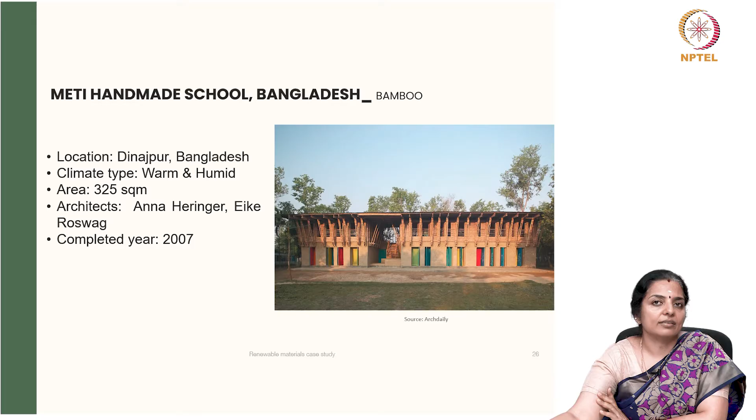Bangladesh is one of the most densely populated countries in the world. It has a lush alluvial plain in the Bay of Bengal. Almost 80% of the population live in rural areas, with an average of almost 1000 persons living in every square kilometer.

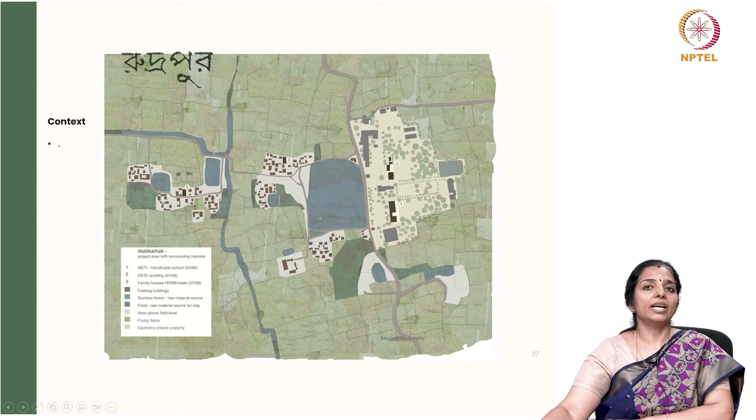Earth, soil and bamboo are the commonly used vernacular materials in these areas. Although construction methods are prone to many errors and many buildings are constructed without foundations or damp-proof courses. These structures are typically only 10 years old and require frequent maintenance, and are frequently vulnerable to damage because of wrong information or being ill informed about the appropriate construction method.

With a free and open learning environment, Meti School seeks to support each student's unique skills and interests while accounting for their varying learning pace. It provides a different approach to teaching than the conventional frontal method. This idea is reflected in the architecture of the new school, which offers a variety of places and purposes to complement this method of construction and teaching instruction.

Now, this is the plan of the Meti school. On the ground floor, it has thick earth walls. You can see the earth walls are extremely thick on the ground floor, and three classrooms are located, each with their own access opening.

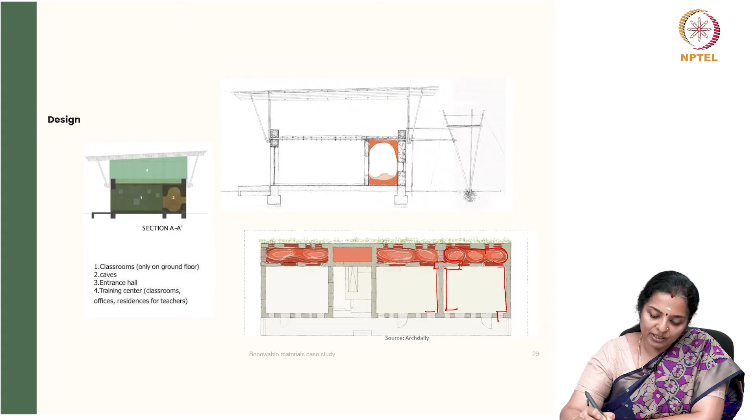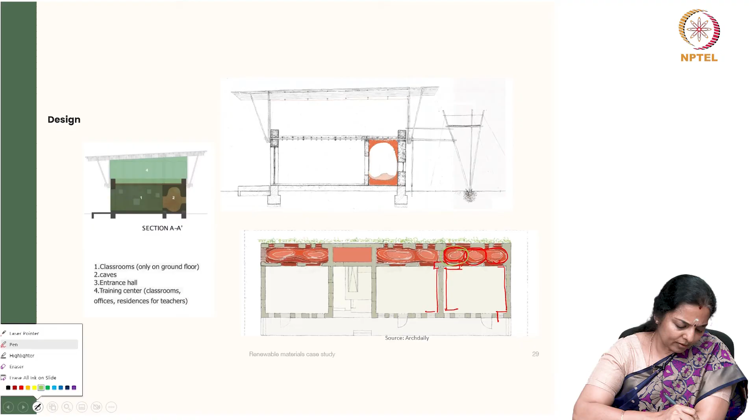And it opens into an organically shaped system of caves in the rear. So, you can see in the rear it opens into a small system of caves.

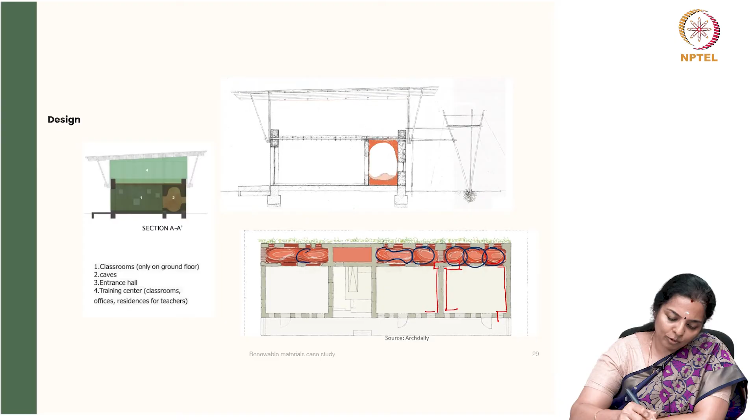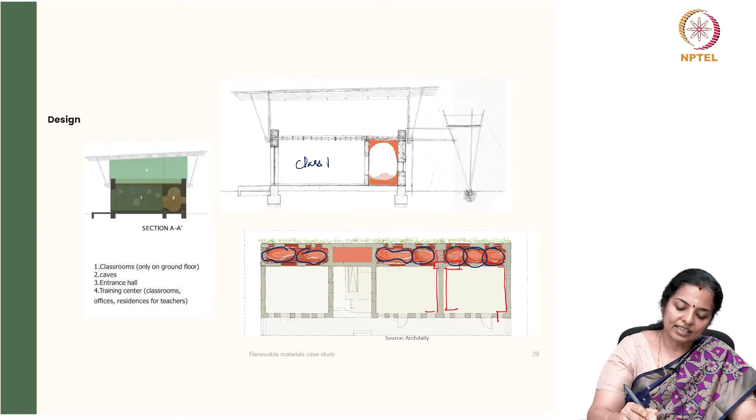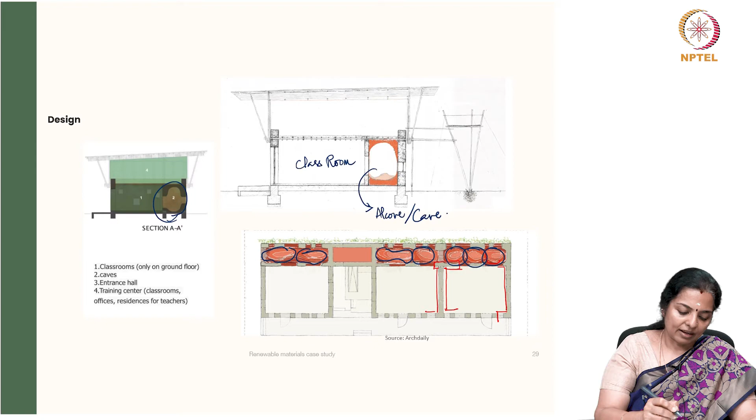In the section you can see that this is the classroom, and this is a small alcove called as the cave, as can be seen here. It is a cave which is only, and there you have classrooms only in the ground floor, separate classrooms only in ground floor.

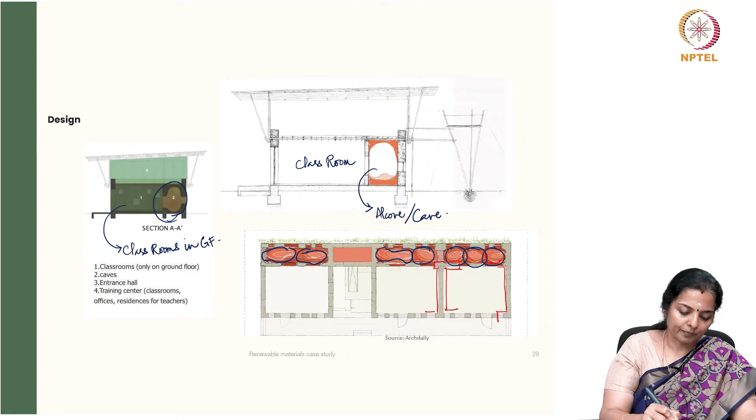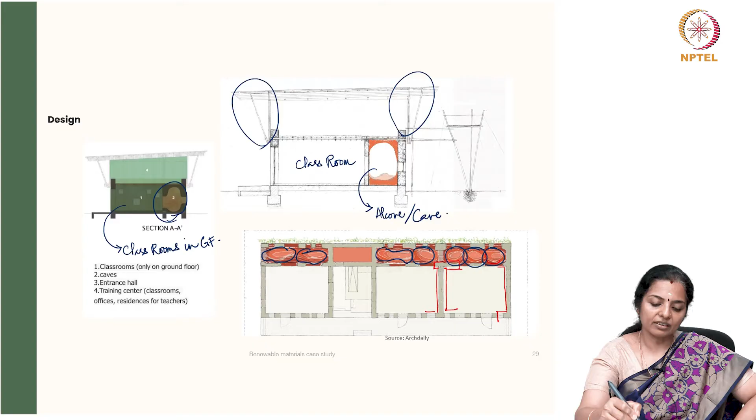The upper floor is by contrast very light and open. If you see, bamboos here, very transparent, and transparent in the sense very light. So, it is very light and open. The openings in it, the bamboo walls offer sweeping views across the surroundings. It has large interiors providing space for movement, providing movement to people, and because of this views as well as breeze, it is very porous.

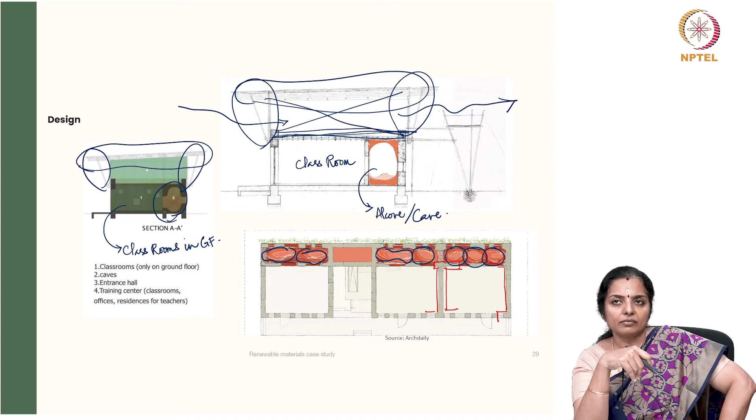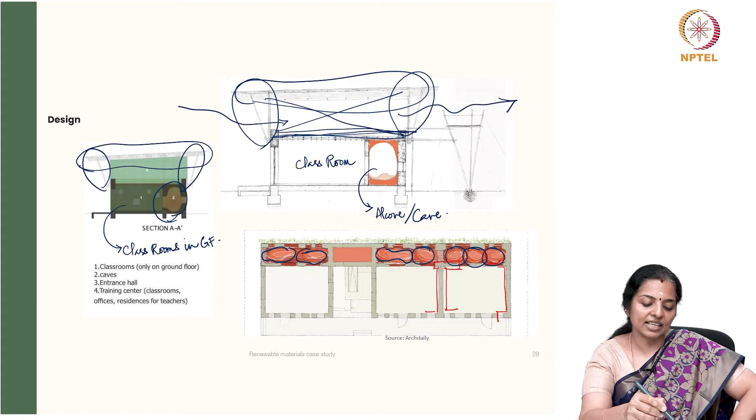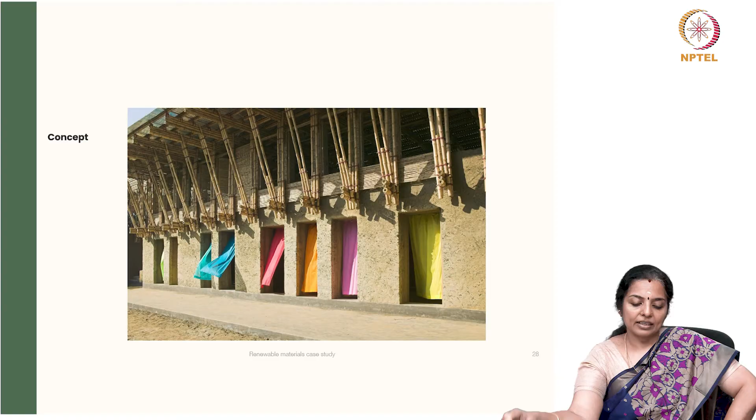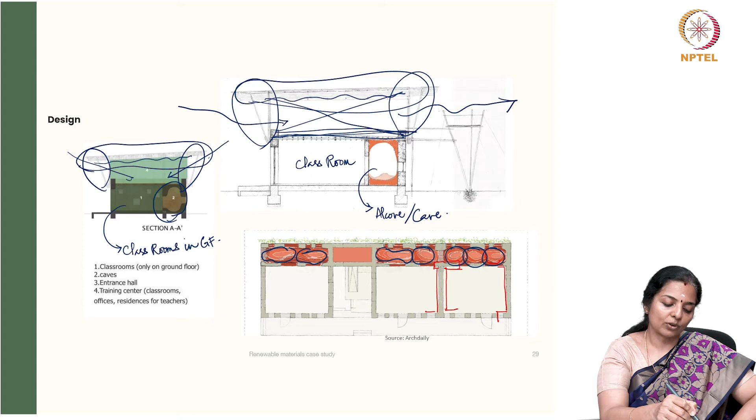Shadows from bamboo strips play across the earth floor and contrast with the colorful materials on the saris in the ceiling. The ceiling has a number of saris draped. I could show you in some other picture that the ceiling has saris, and the light from this and through this casts a beautiful shadow on the floor.

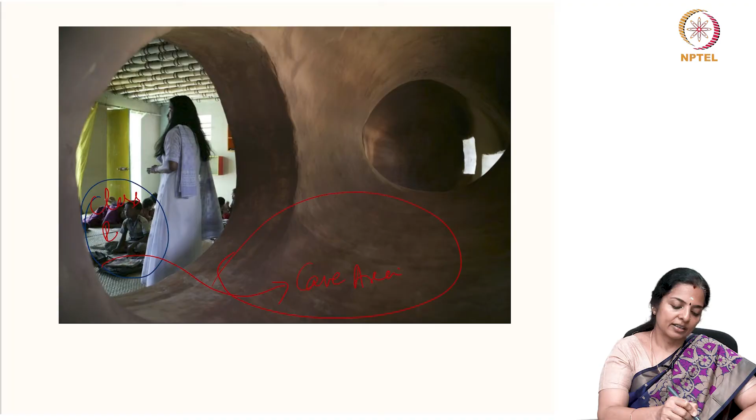This is the classroom area, and this is the cave area. So, students can seamlessly move from classrooms to the cave area. That is by far its design.

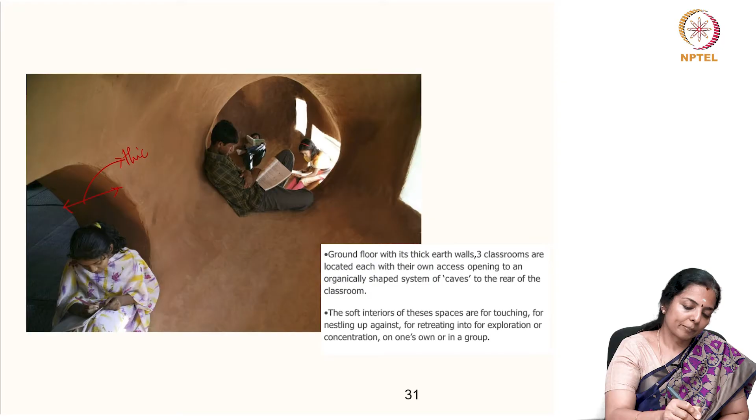So, you can see the thick walls. The walls are extremely thick mud walls, and there are classrooms, and then this is the access to the cave from the classrooms.

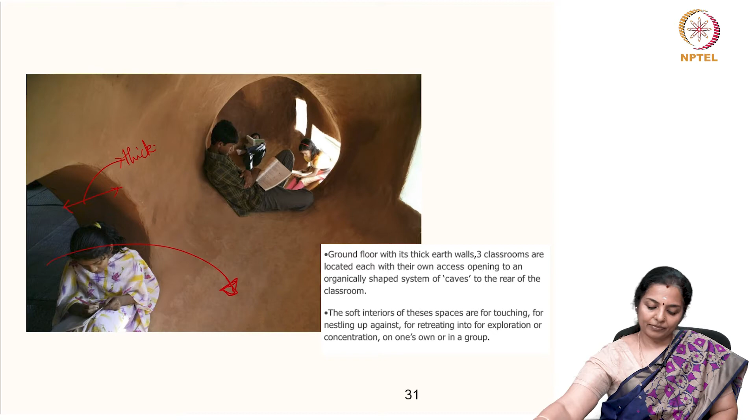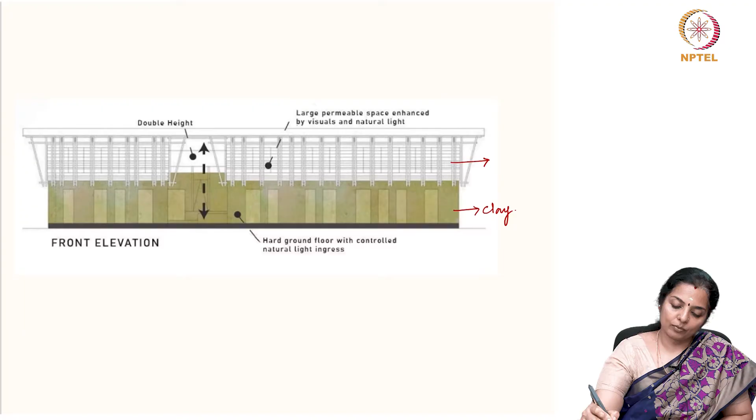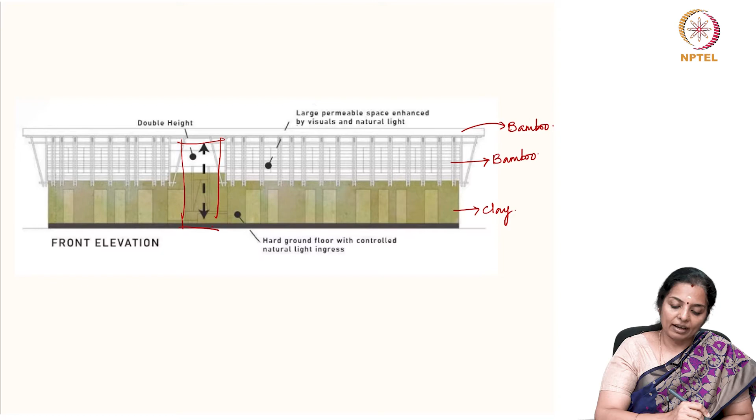So, you can see on the ground floor, this is made up of clay, it's with its alcove, and this is alcove or caves or whatever they call, and these are made up of bamboo. This is also made up of bamboo, and only in one place you have double height, and you have these spaces are large and permeable, allowing breeze to move in and also light to penetrate inside.

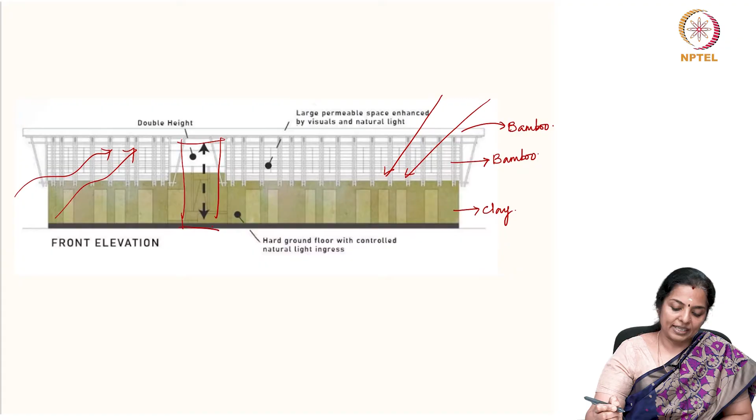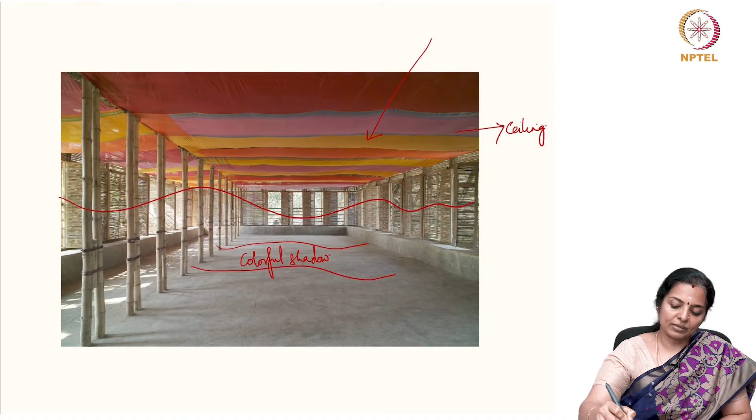These are the saris on the ceiling through which light enters and casts a colorful shadow on the ground, and you have seamless wind movement across the classrooms.

You can see the infill is made up of bamboo mat, and everywhere there is use of bamboo on the first floor.

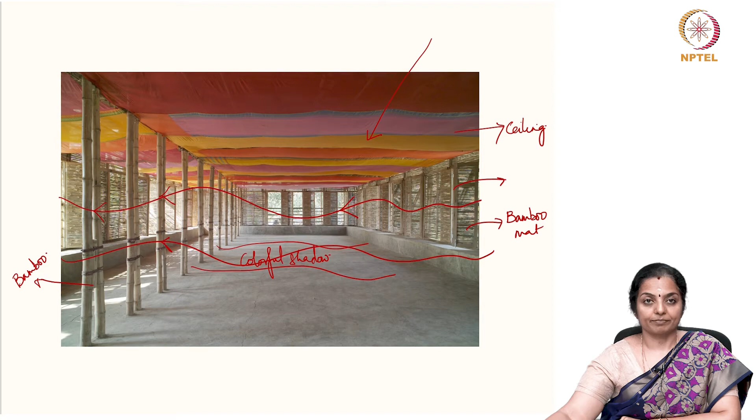Now, the upper story is a frame construction of 4-layer bamboo beams and vertical and diagonal members arranged at right angles to the building. The end of the frames at the short ends of the building and the stair also serves to stiffen the building.

These are connected through additional structural members with the upper and lower sides of the main beams and equipped with additional wind bracing on the upper surface of the frame. Beneath, it provides support for the corrugated iron roof construction and is covered with timber paneling and adjusted in height to provide sufficient runoff.

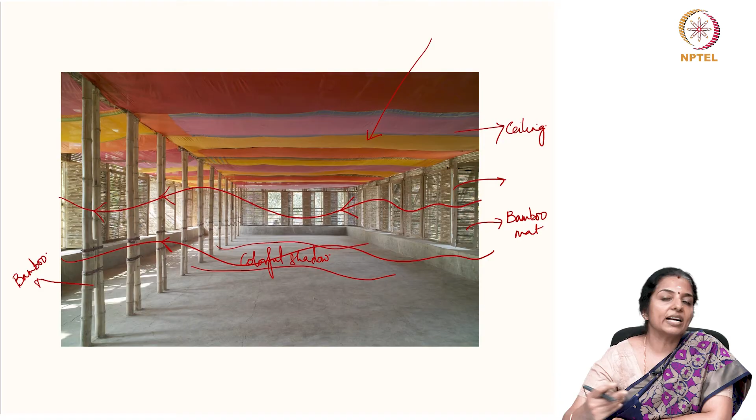The ceiling of the ground floor is a triple layer of bamboo canes, as can be seen here. So, you have bamboo canes, you have the eave area, and this is the classroom area, whereas this is the eave area.

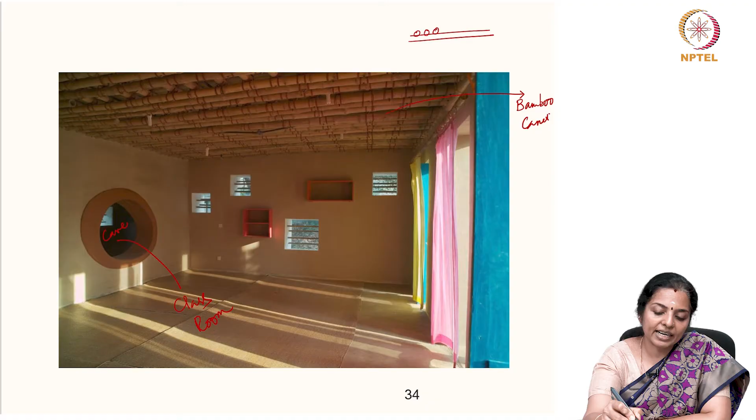The ceiling here has 3 layers of bamboo canes with the central layer arranged perpendicular to the layers above and beneath. So the second layer is arranged perpendicular in section. This is how it will look: first layer, second layer which is perpendicular, and third layer which is on top of it.

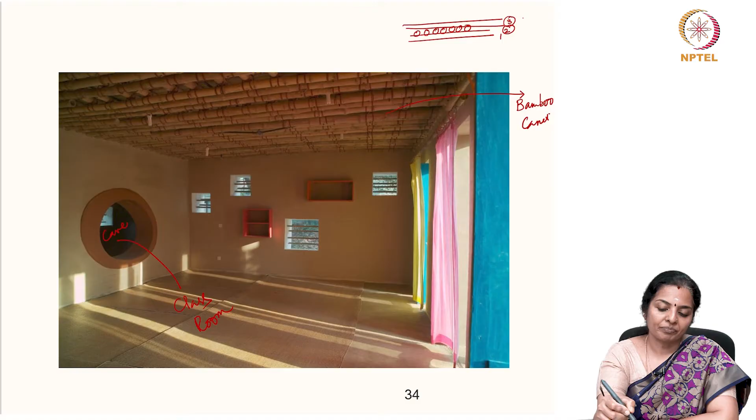Beneath, it provides lateral stabilization and a connection between the supporting beams. A layer of planking made of split bamboo canes is laid in the central layer and filled with earthen mixture, analogous to the technique often used in ceilings of European timber frame construction. And then there is an infill of mud here.

The structure is supported by a brick masonry foundation that has 50 centimeter depth and has a face cement plaster finish. The most popular item produced by Bangladesh's building materials sector is bricks.

The other most important and significant addition to native earthen building abilities is the damp proof course. 2 layers of PE film that is readily available locally make up the damp proof course.

The ground floor is realized as load bearing walls by means of a cob walling like technology. With the help of cows and water buffalo, a long straw earth combination is created, which is then piled to a height of 65 centimeters per layer on top of the foundation walls.

Creating a mud construction, after a few days, any excess material that reaches beyond the breadth of the wall is cut with sharp edges or spades. After a drying period of about a week, the next layer of cob is applied.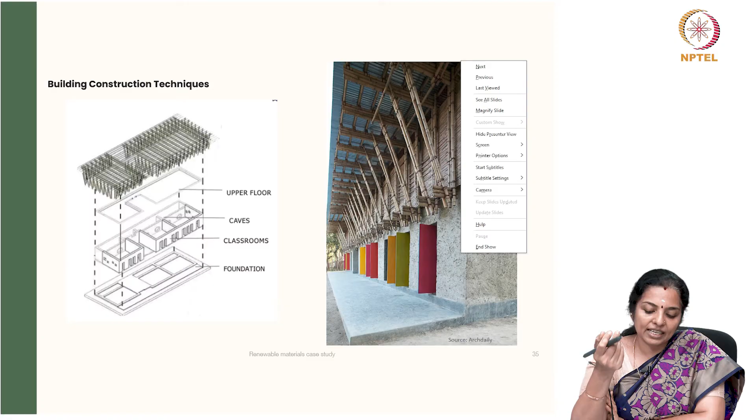In the third and fourth layers, the door and window lintels and jambs are integrated, as well as the ring beam made up of thick bamboo canes as a wall plate to the ceiling. So, these are all cob walls made up of mud. There is a damp proof course.

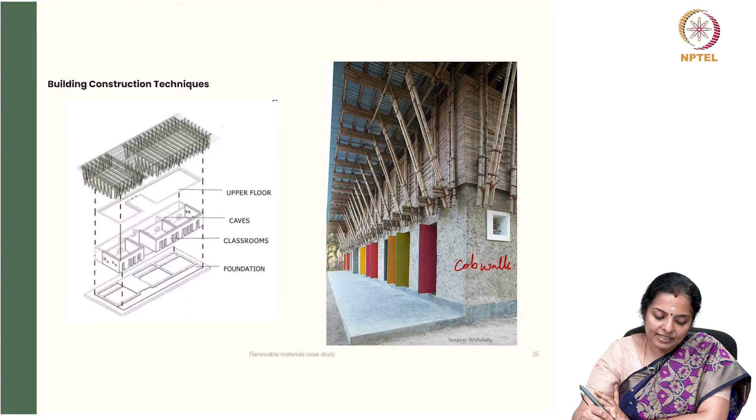So, here you can see the foundation, and then you have classrooms here. These are the caves, and then you have the upper floor, and this is the double story height, and then you have the roof layer.

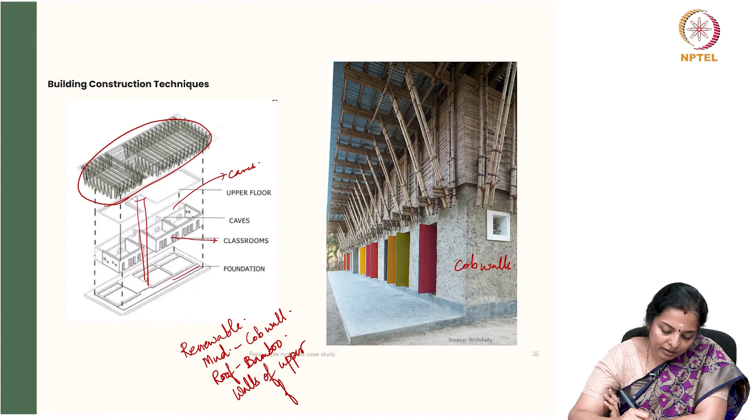All the materials that are used are renewable, because so far mud is used on the ground floor in the form of cob walls. The roof is made up of bamboo, and the walls of the upper floor are made up of bamboo.

The exterior surface of the earth walls is visible, and the window jambs are rendered with a lime plaster. The framework construction of the facade to the rear is made up of bamboo canes placed in footings and made of old well pipe and with split horizontal timbers as lattice work.

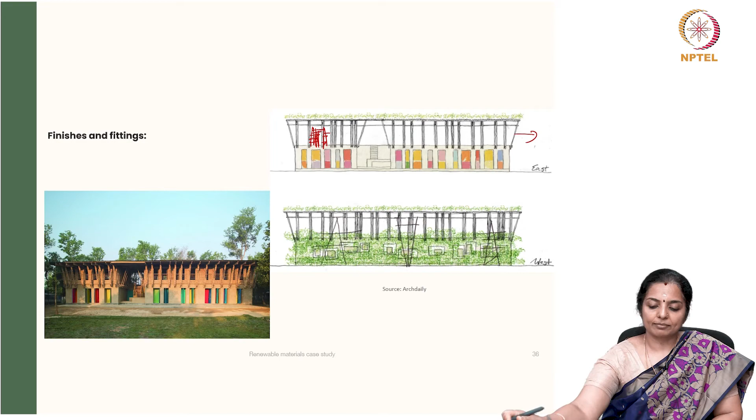So, there is intense lattice work here, and all these are split bamboos posted there. This is made up of clay.

Now, the interior surfaces are plastered with clay plaster and painted with lime based paints. The so-called caves are made of straw earth daub applied to a supporting structure of bamboo canes and plastered with red earth plaster.

The upper story facades are clad with window frames covered with bamboo strips and coupling elements hung onto the columns of the frame construction. A fifth layer of cob walling provides a parapet around the upper story, forming a bench running around the perimeter of the building and anchoring the upper story frame construction and roof against wind from beneath.

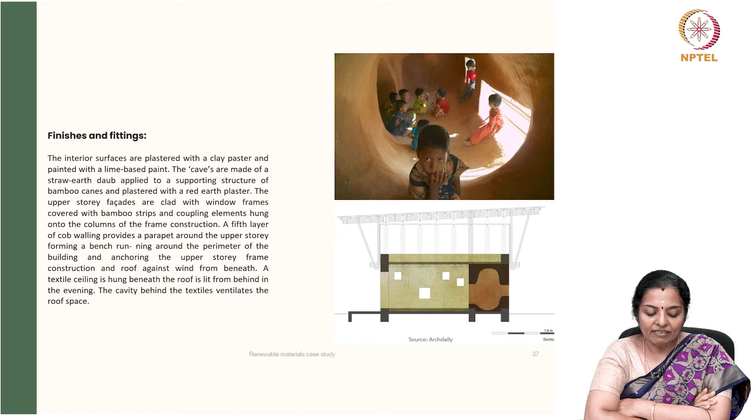A textile ceiling is hung beneath the roof and is lit from behind in the evening. The cavity behind the textile ventilates the roof space.

A beautiful and perfect example of use of renewable materials, and since it is a school building, the on-site labor and training of workforce takes place only with the rural people. The masonry foundation was constructed by a company from the regional capital Dinajpur. The earth building works and bamboo construction was undertaken completely by the local laborers.

The building techniques were implemented and developed on the job together with architects from Germany and Austria. 25 local tradesmen from the vicinity were trained during the building works, creating new jobs and providing professional help for self-help. So a complete picture of how low embodied and low carbon buildings can be built with renewable building materials, using technology from tradition as well as the contemporary period, and getting laborers or help primarily from the local area, making it a self-help labor intensive project.

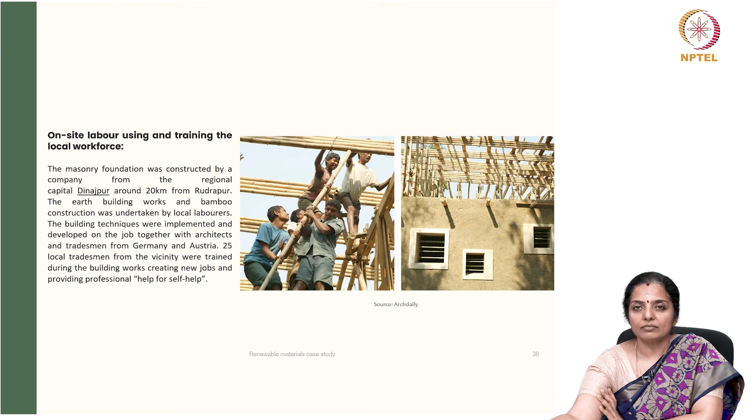So the Meti school is an exemplary nature for transferability and follow-on projects. The school handmade showcases the potential of good planning and design, from the arrangement of the building on the site to the realization of aspects in detail. Further, it demonstrates the possibilities of building with earth and bamboo using simple methods as a continuation of local rural building tradition, and can serve as an example for future building developments in that area.

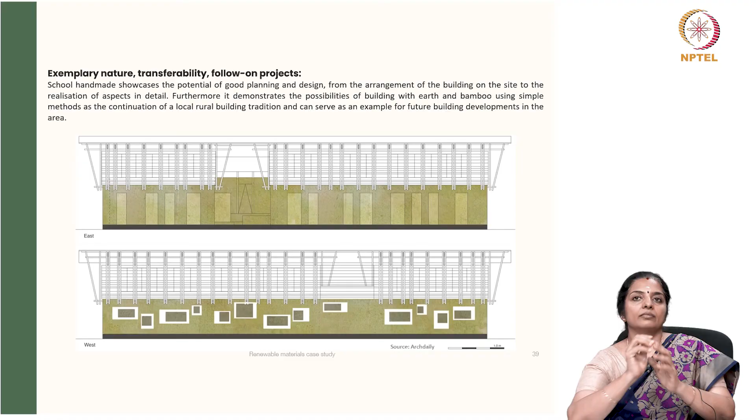So this building, Meti School, becomes a good example to showcase, as it is built using local people.

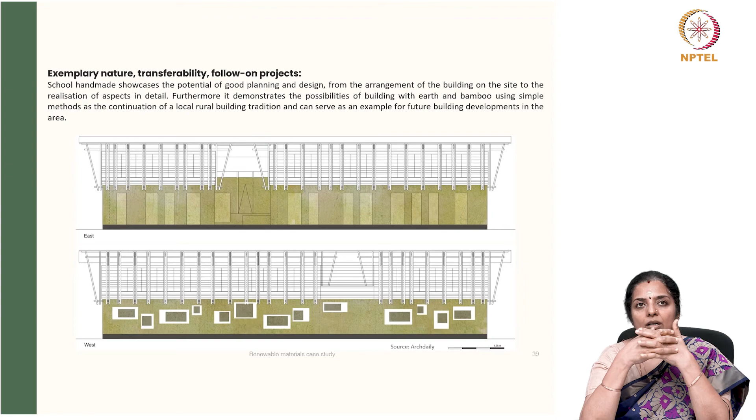The next example we see is called the Tecla house, which is a 3D printed house from locally sourced clay. This is a 3D printing based house, a low carbon home prototype. It's the first eco-sustainable housing prototype with 3D printing, with the ink being raw earth.

Tecla is a combination of technology and clay, referring to the fact that the house was built with clay taken from a local river bed. The house is constructed from two linked domes, which are 3D printed. The goal is to provide low cost emergency shelter for climate refugees without sacrificing the inherent thermal insulation that clay offers.

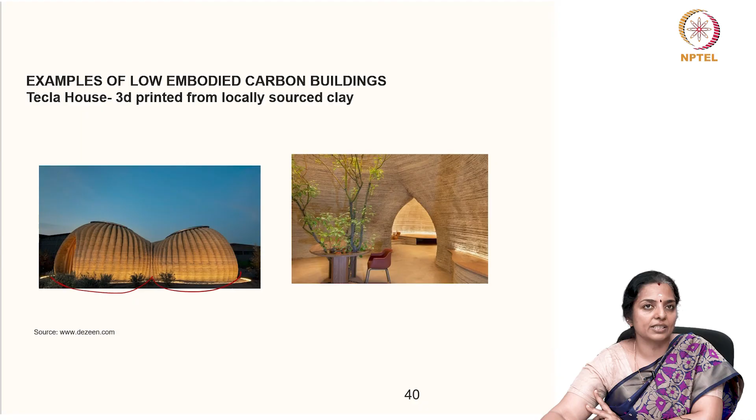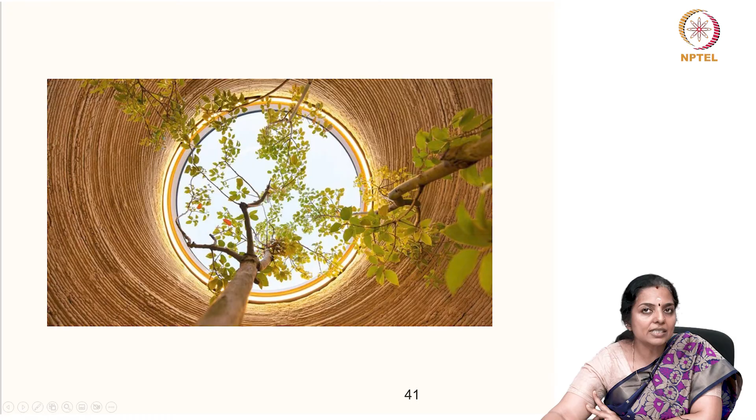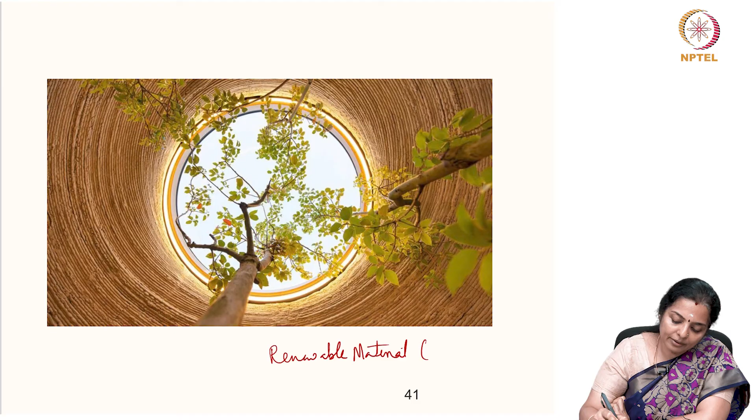The extreme form flexibility is the most significant benefit of this house, as a combination of renewable material, which is mud, plus 3D printing, which is technology. It offers a lot of freedom to the designer, because no house needs to be the same. There can be variations, and this variation or optimization which is arrived at is in the infill.

The house can take any degree of sinusoidalness. Three factors are taken into consideration when you optimize the infill for this system: the thermal mass, which rises with increasing thickness of the earthen material in the infill, the ventilation aspect, and the thermal insulation aspect.

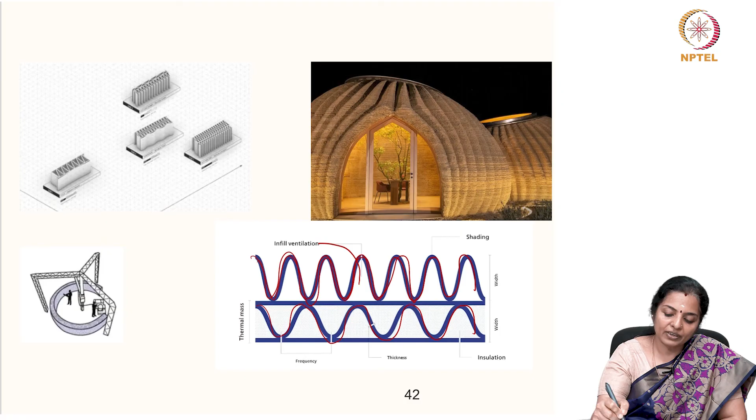Based on that, the 3D printing mud is filled in, and this is an example of how optimization of the three aspects happens: thermal performance, thermal mass, and ventilation, and how these three are arrived at.

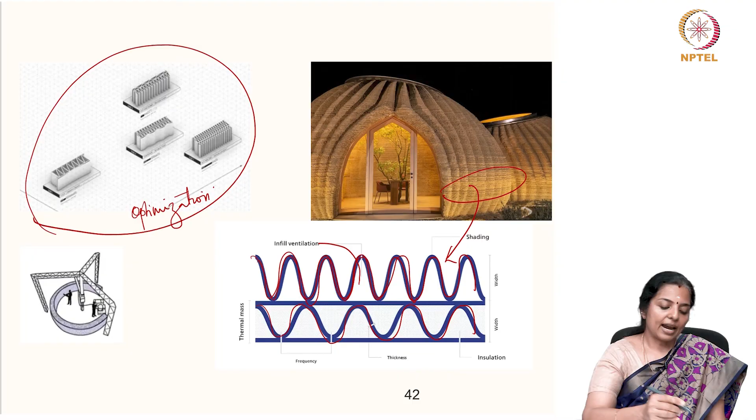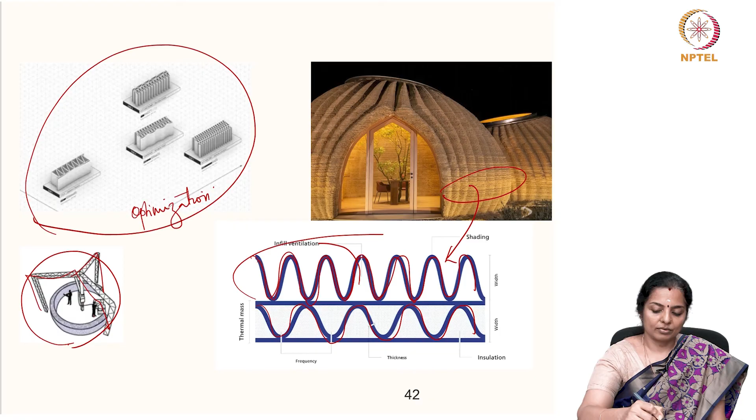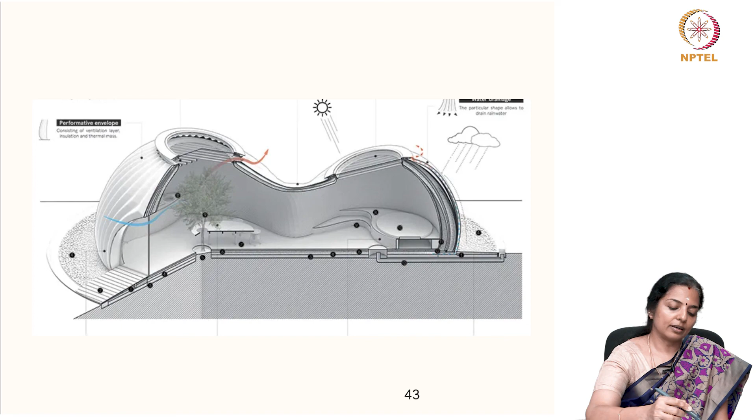Based on that, this is the house structure, and this is the 3D printing, where the 3D printer's ink fills into this form. This is the section wherein you can see how ventilation is provided and how it can be infilled. This varies based on the optimization.

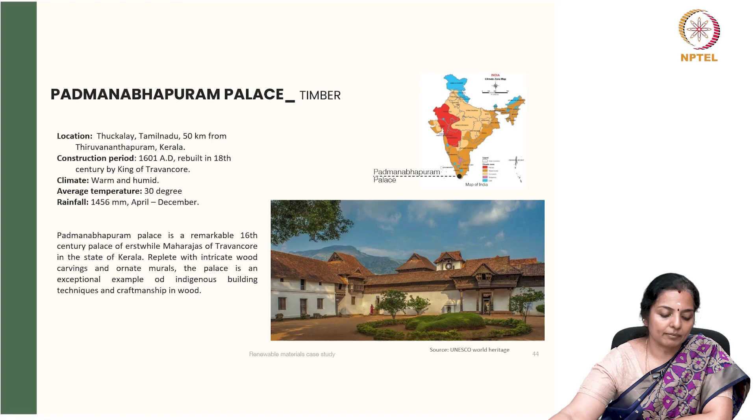The last small example we take is of Padmanabhapuram Palace, a vernacular architecture located in Kerala, a 16th century palace of the Maharaja of Travancore. It is made completely out of intricate wood carvings and murals, and is an exceptional example of indigenous building techniques and craftsmanship in wood, still withstanding the test of time, as it was started in 1601 AD. This is the plan and section of the Padmanabhapuram Palace.

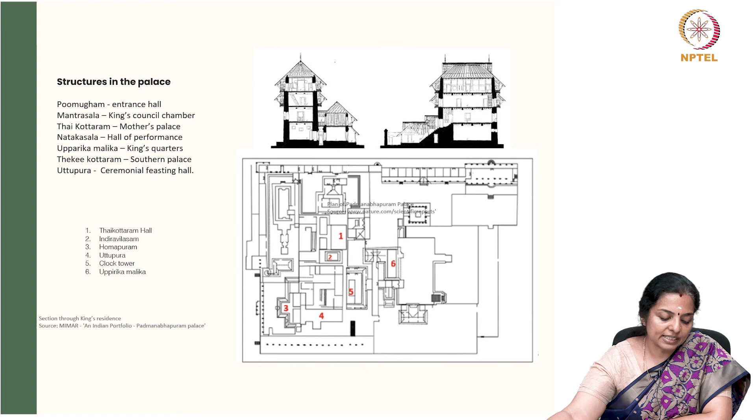It is very popular because it is made up of timber or wood. So we stop our class with this, having seen examples of buildings built with renewable materials. The first is a handcrafted building called Meti school. The second is Tecla, housing for refugees, a combination of renewable material plus technology. The third is the vernacular architecture of Padmanabhapuram Palace, made completely out of timber and built in 1601 AD, withstanding the test of time.